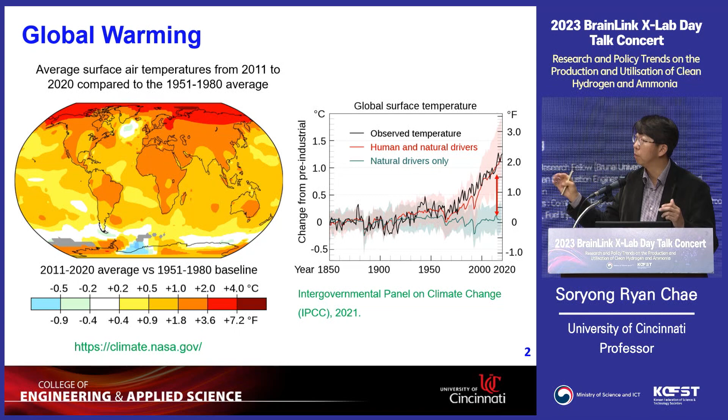So why is hydrogen so important? If we think about volume and energy density, this is pretty much obvious. When we drive a vehicle to get a 500 kilometer range, you may need 10 gallons of diesel. But with a lithium-ion battery, the volume or mass of the battery is tremendous, maybe more than 10 times. But hydrogen is very competitive, we just need 6 kilograms of hydrogen to fuel the car for a 500-kilometer range. So this is an obvious benefit why we are looking at hydrogen as an energy carrier.

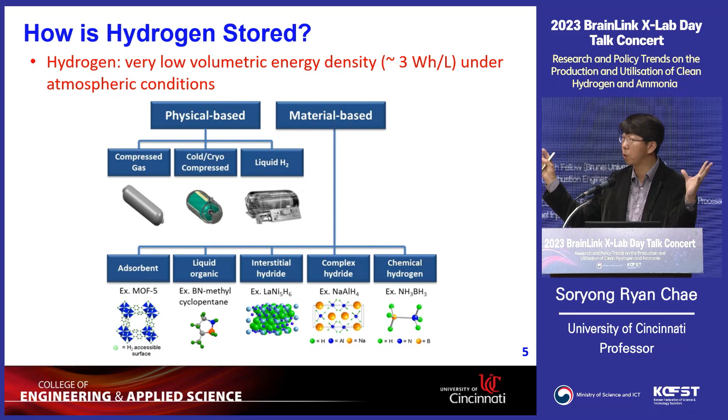And how we can store hydrogen: there are some other ways, but typically we use a physical method. We can compress, we can change gas to liquid, and we also use some materials including adsorbents, MOF, or some hydride forms. So we can store hydrogen and release it whenever we need. However, if you see this graph, there are so many operating conditions limiting the practical storage of hydrogen. For example, on the left, for liquid hydrogen, pressure will be very moderate, but temperature is minus 250 degrees Celsius. For compressed hydrogen, temperature is about room temperature, but we need a very high pressure. So there are pros and cons for each method, carefully thinking about the operating condition, how we can compress or store it, and how we can release hydrogen.

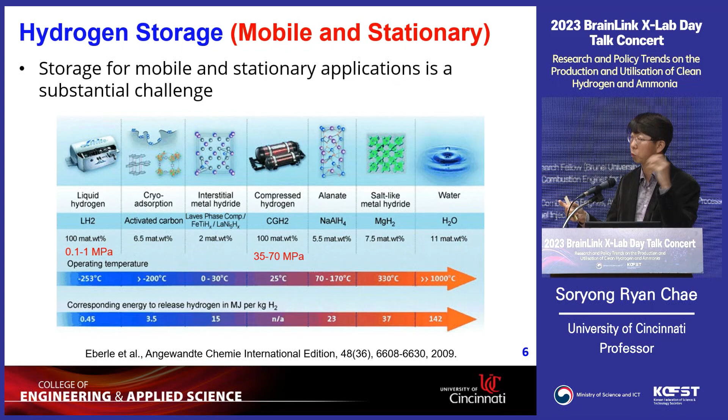The practical approach is how we make this more economically feasible. So please remember that, not just hydrogen, but there are a lot of energies involved to capture or store hydrogen and release it for energy production.

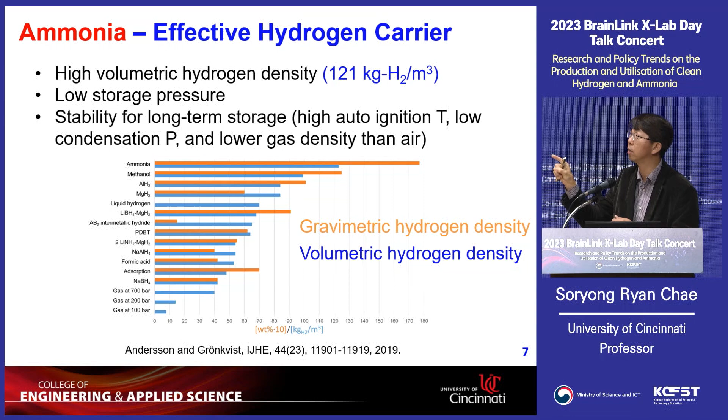As one alternative, I'd like to talk about ammonia. Ammonia has very high volumetric hydrogen density, about 120 kilograms of hydrogen per cubic meter. And ammonia has a very high auto-ignition temperature and low condensation pressure, and also lower gas density than air. So there are many benefits. We can use ammonia as an energy carrier, then it can be a source for hydrogen production. On this graph, on the top, I'm sorry for the small characters, ammonia indicates very high gravimetric hydrogen density, and the blue bar indicates volumetric hydrogen density. So it will be a good candidate as an energy carrier.

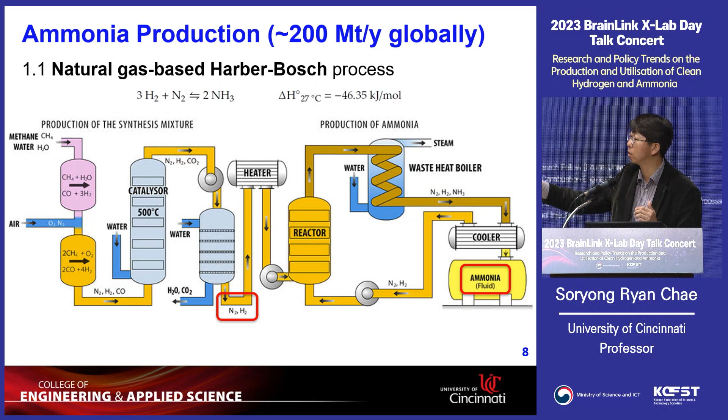How can we produce ammonia? If you are working in the chemical engineering area, the traditional Haber-Bosch process is very famous. We first produce a syngas containing carbon, nitrogen, and hydrogen. Then that goes to the reactor at very high temperature and pressure. Then eventually we produce NH3. Then through condensation, we can produce ammonia. And there are also other methods based on electrolysis.

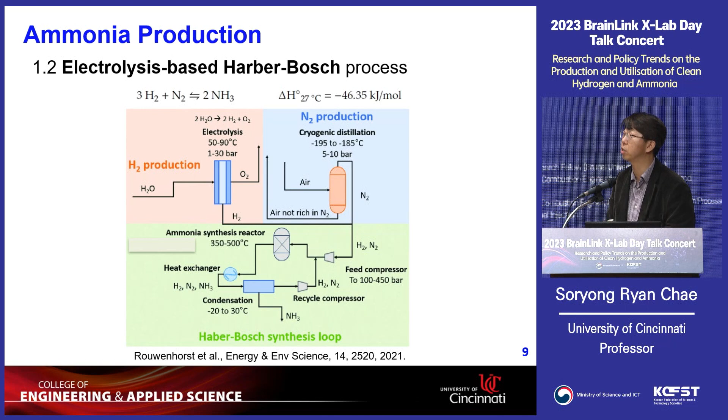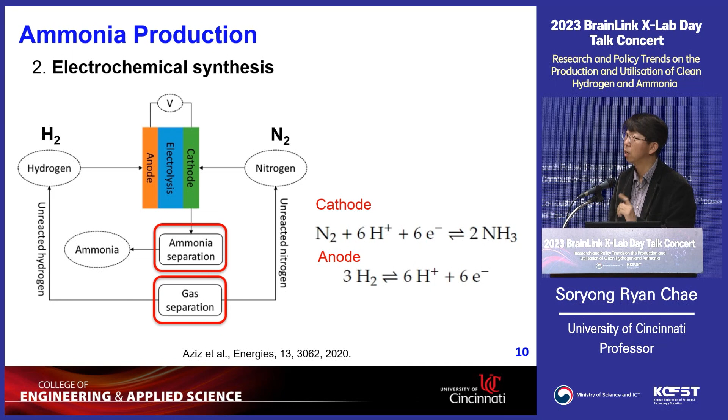However, if I highlight the challenging point here, we need to separate ammonia, and we also need to separate hydrogen and nitrogen to recycle them into the system to increase the efficiency. So there's a very good R&D point for the future.

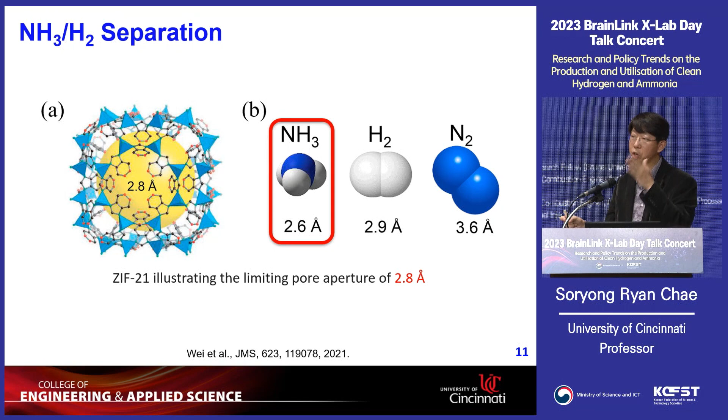And I'm talking about ammonia and hydrogen separation because they are very close to each other: ammonia 2.6 angstrom, hydrogen 2.9 angstrom. Technically, it's very hard to separate them, but scientists are working hard. They invented a very nice material with a very sharp cutoff, so they can separate ammonia and hydrogen very efficiently.

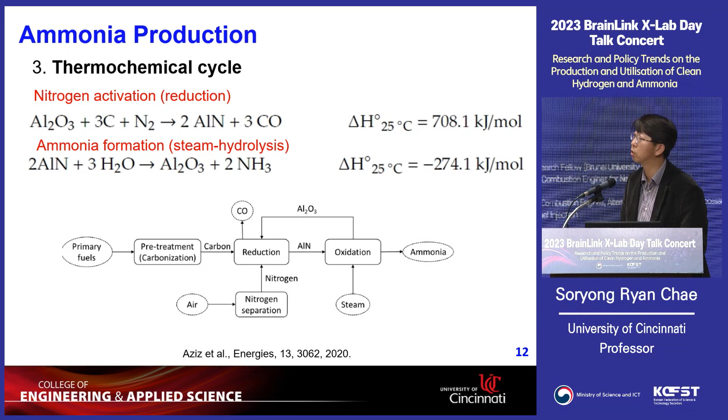And the last method I want to introduce, maybe the second last one, is the thermochemical cycle. If you see here, we have a carbon source and a carbon precursor. Then with aluminum oxide, we can have aluminum nitride. Then we oxidize the aluminum nitride to ammonia, so we can get ammonia. There is a lot of thermodynamics involved here for the reduction and steam hydrolysis, so it is a good challenge for our society.

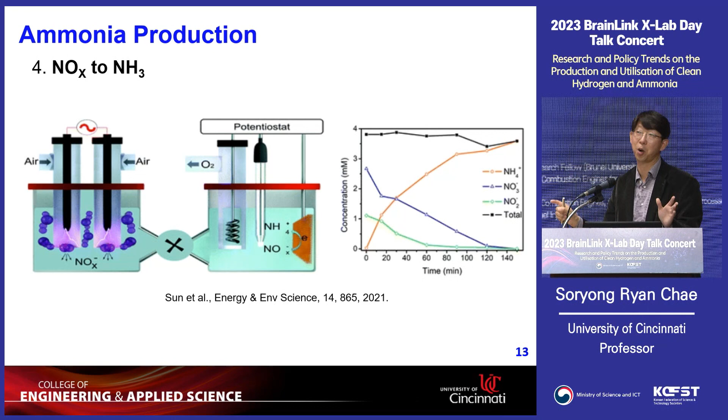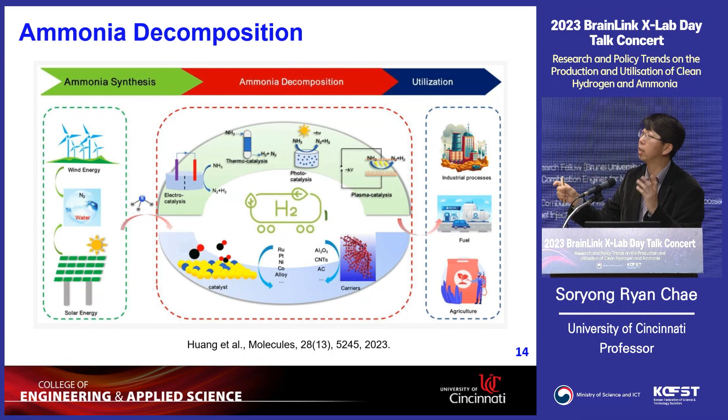Once we have ammonia produced, the next step is we transport that ammonia and we get the hydrogen. I'm sorry for the small characters, but through electrochemical reaction, thermochemical reaction, photocatalysis, and plasma catalysis, we can get hydrogen from ammonia, but a lot of catalysts and thermodynamics are involved.

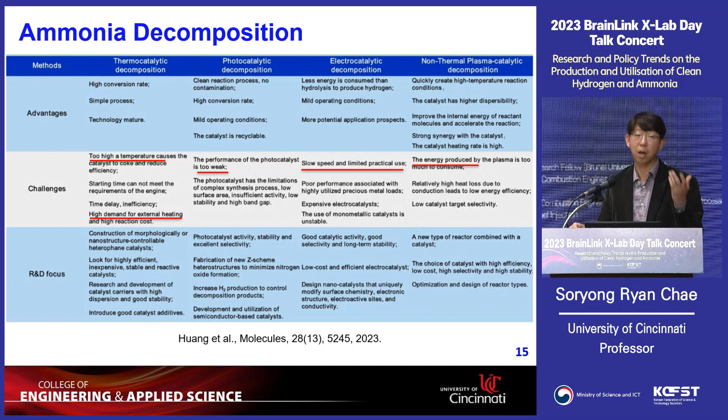I would highlight that all these methodologies are technically feasible, but we still suffer from high operation cost, the instability of the material, and the stabilization of the process. So there are still a lot of things we can work on together to make green ammonia.

So with that, I'd like to conclude my talk: ammonia is a very good potential hydrogen carrier, but we need ammonia production and decomposition. At the moment, ruthenium-based catalysts are the winner in the market, but whether we can find a more economically feasible material, stable for long-time operation, is the challenging point.

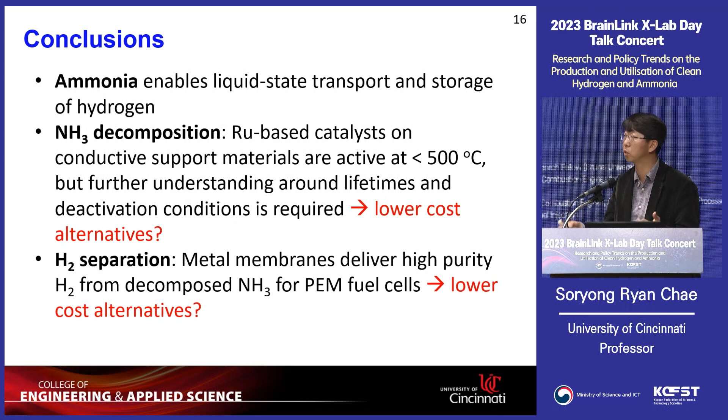To separate hydrogen from the mixed gas, metal membranes are quite promising. There are a lot of studies, but it's still a very expensive material. So whether we can fabricate a hybrid type membrane with better efficiency and selectivity to separate hydrogen is a challenge and also an opportunity for us.

Through this BrainLink X-Lab Day, I met a lot of good fellows and experts working in this area. So I'd like to launch a special issue on this topic through this nice discussion, a special issue next year in the Chemical Engineering Journal. I'd like to see that happening through these wonderful opportunities.

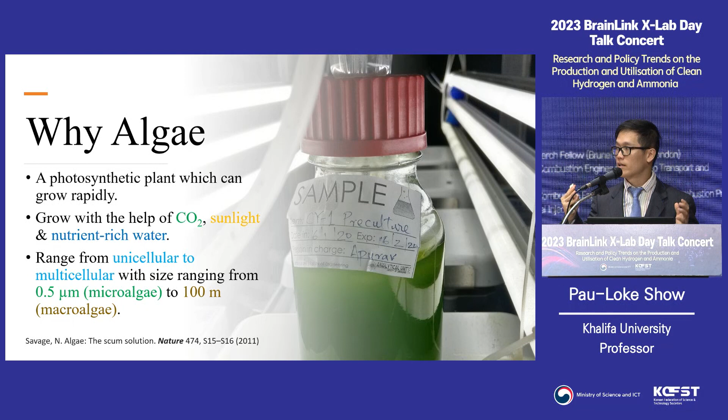Right, so microalgae grow with carbon dioxide, sunlight, as well as nutrient-rich water. Nutrient-rich water can be salt water, seawater, or wastewater as well. Microalgae range from unicellular, which is a single cell, to multicellular, which is a lot of cells, with sizes from 0.5 micrometer, which is very small, up to very big ones we call seaweed, which can be up to 100 meters.

Right. Just to let you know, there are a lot of ingredients inside microalgae. The first one is carbohydrate, which you can use to make bioethanol, biobutanol, bioplastic. The second ingredient is protein, which you can use to make animal feed, human nutrients, single-cell protein, as well as cosmetics and biofertilizer.

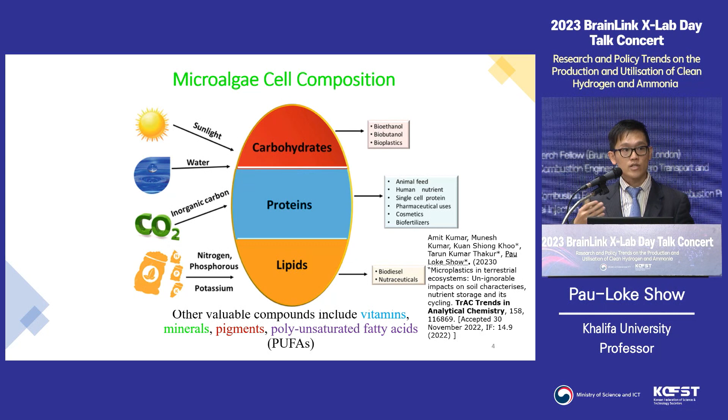And last but not least, the special ingredient inside microalgae which everyone wants to get is lipid, which is the oil content in microalgae, which you can use as a biofuel as well as other nutrient products. Right? Of course, we cannot forget there are other valuable compounds inside microalgae, for example vitamins, minerals, pigments, poly-unsaturated fatty acids, which you can use as supplements or cosmetic products.

Right. Just to share with you a quick fact about microalgae. Microalgae is actually superior to conventional protein feed. Why do we say so? Because to produce 10,000 kg of protein from microalgae, you only require 0.7 to 2.5 hectares of land, which is relatively much less land compared to crops producing that much protein.

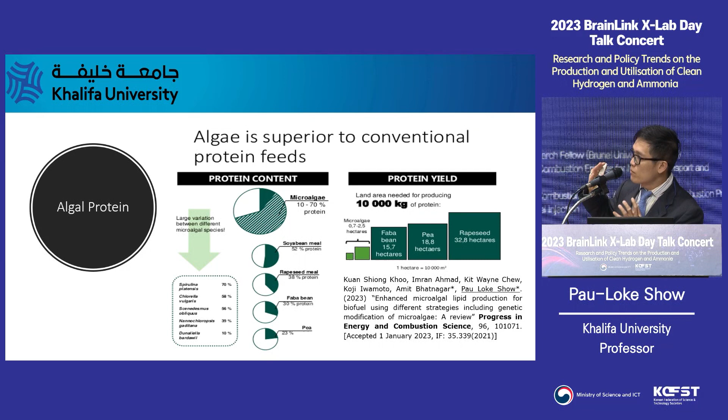So this is very good for future food, because nowadays the population keeps growing, and we have limited land for human beings. That's why we need more food, and that's why we need more land to grow enough protein for human beings.

Future food, because plant-based meat is now a very hot topic, so you can use microalgae to grow future food. Microalgae also have the ability to absorb heavy metals, so we can use them as water cleaners in industry. As well as pigments, as I mentioned, astaxanthin, fucoxanthin, all these pigments are available in microalgae. And last but not least, microalgae is a third-generation biofuel, so you can use it as biodiesel.

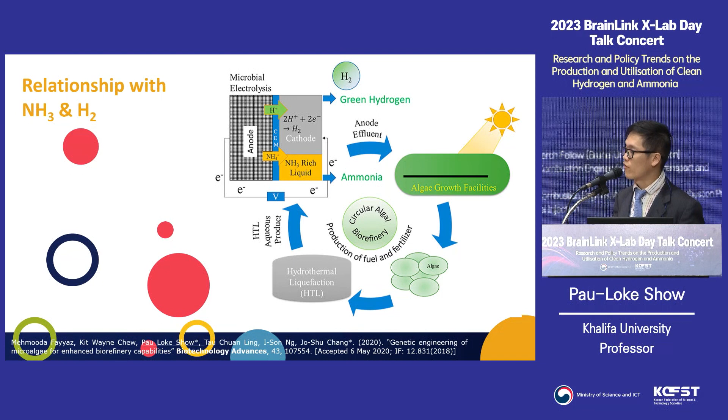Right, so let me share with you a little bit of this relationship. In general, you can see it requires a circular algae biorefinery. From the algae growth facility, you can produce as much biomass in terms of microalgae. They undergo hydrothermal liquefaction, which we call HTL. Then you will produce a lot of this ammonium. From the ammonium, they recycle again using this circular algae biorefinery. Right, so what is so important?

Because in the past, we were talking about first generation biofuel. Everyone was talking about corn, cassava, and also sugar cane. Second generation biofuel, we're talking about lignocellulose, which is bio-waste, sugar cane, palm waste. Then third generation biofuel, everyone talking about microalgae. That's why you can see microalgae produce a lot of biodiesel, biofuel. But this has become history. Nowadays, starting from 2020, everyone is talking about fourth generation biofuel, where we need to look at AI, artificial intelligence, with synthetic biology, where we do some genetic modification inside so that we can produce as much production as we want.

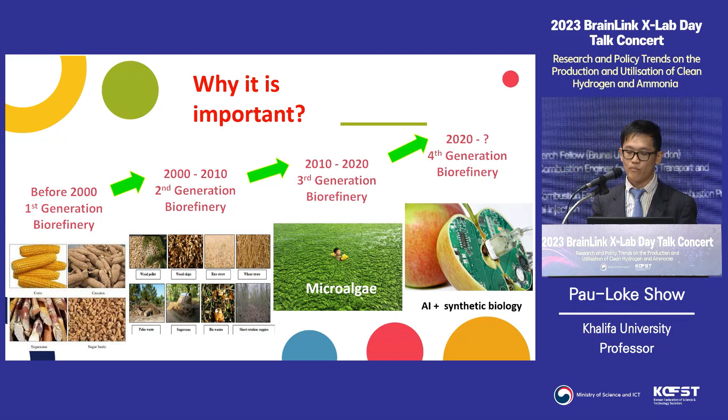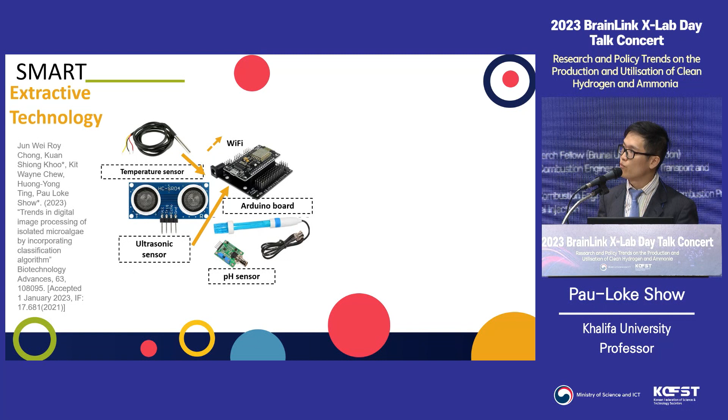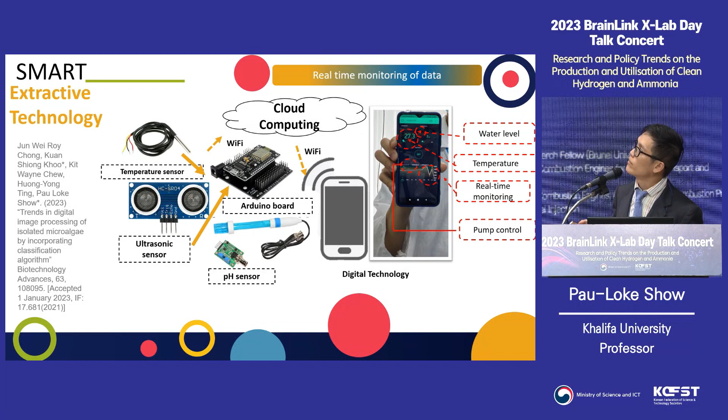We just extract microalgae using our system. We control it using a temperature sensor, ultrasonic sensor, pH sensor. Then we link to the Arduino motherboard. Then we link to the Wi-Fi to have big data analysis under a cloud system. Then connect to digital technology, which is a mobile phone or your computer. This is the interface with the apps that we developed. We can see the water level, temperature, real-time monitoring, as well as pump control.

Right, so let me continue with the smart extractive technology. This is the smart technology that we generated. I think this is a short video. Yes.

So of course, we claim it as smart because we have the digital as well as sensor in between, so we can monitor and control it and feedback at the same time. So this is what we call smart technology. Actually, this is a new patent that we have got, and some industries are using it, not only in microalgae technology, but in wastewater as well as the food waste industry, because we can use this to extract the active compound that we want.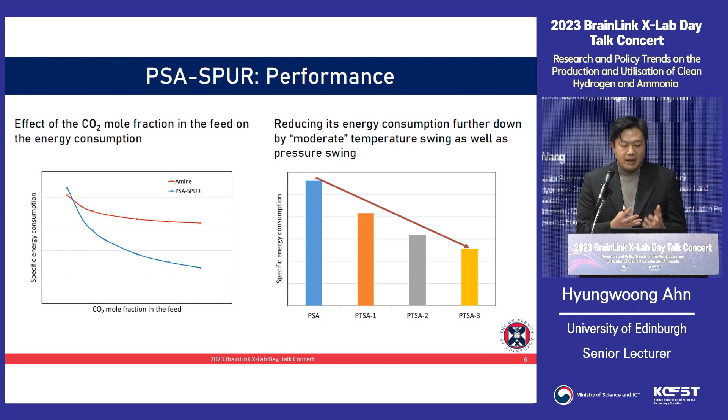We also started a new project funded by the UK EPSRC, and we are collaborating with HD KSOE, the largest shipbuilder in Korea. We are comparing our PSA-SPUR process to the amine process. Basically, our PSA-SPUR process spends less energy than the conventional amine process, and it can spend even less energy by implementing temperature swing as well as pressure swing. So we are demonstrating this process in the lab.

We can capture CO2 and produce a 95% purity CO2 product. The productivity is very high. We are using a commercial sorbent, there's no temperature swing, and we don't need very low desorption pressure.

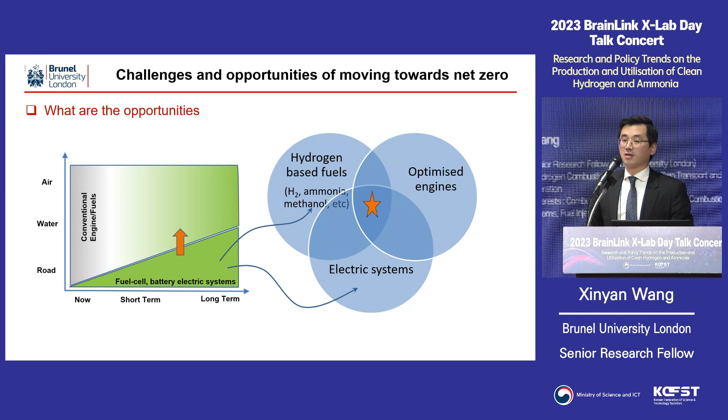Why we use hydrogen? Obviously, it is a good energy carrier. So you can see the top. Basically, by using hydrogen or any other chemical-based source, we'll be able to store energy for a long time and a large energy quantity. And in the UK, government has published the hydrogen strategy to promote the development of hydrogen technologies. Globally, you'll see a lot of research activity.

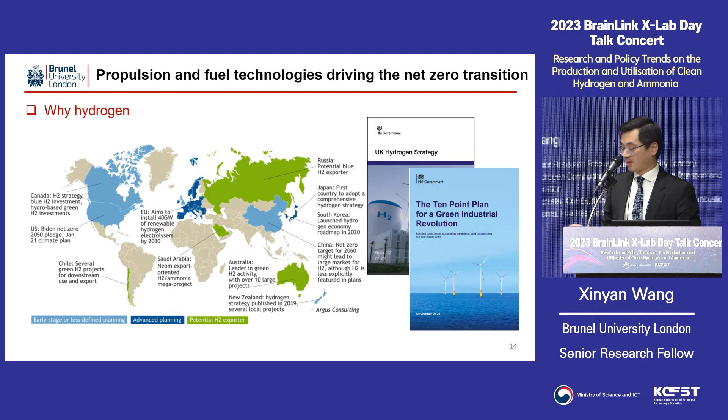And a few weeks ago, UK government also passed the law. You will be able to see the government now is trying to promote the development of hydrogen infrastructure for future hydrogen systems.

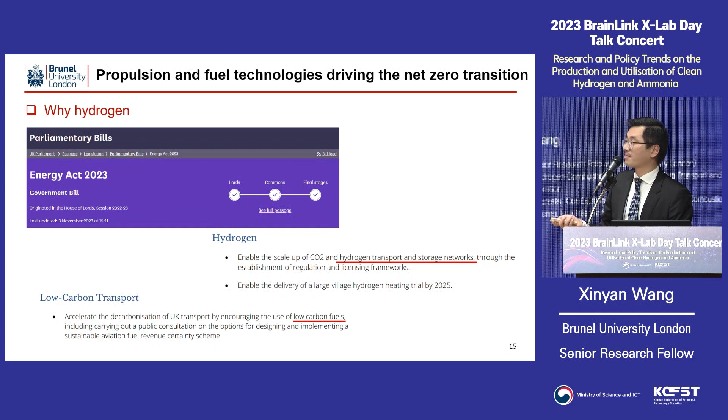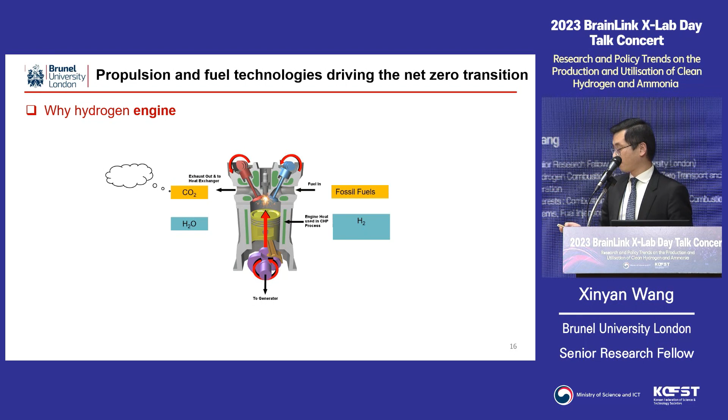And then people may ask why we are still working on hydrogen engines. Obviously, when we burn fossil fuel, the ICE, the combustion engine, will produce carbon emission. But when we use hydrogen or other zero carbon fuel, it will not produce any carbon emission. So if you look at this life cycle analysis, if the engine burns zero carbon fuel, the life cycle CO2 emission will be comparable to fuel cell technology.

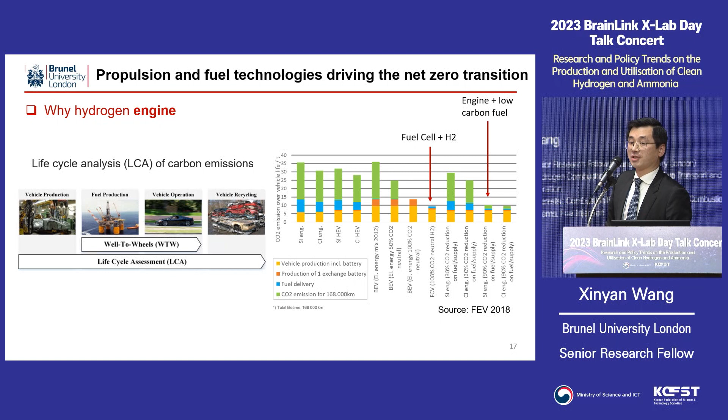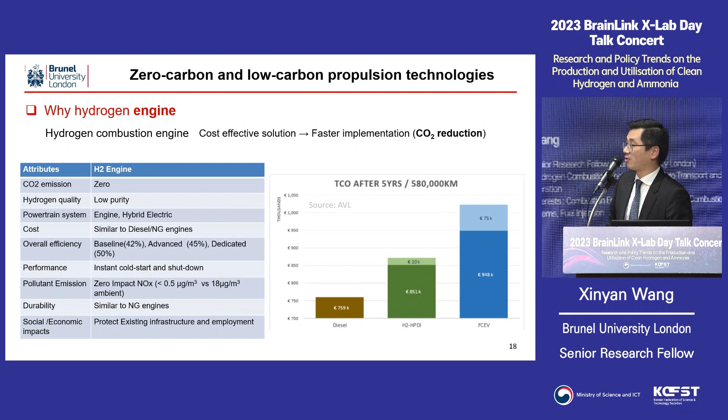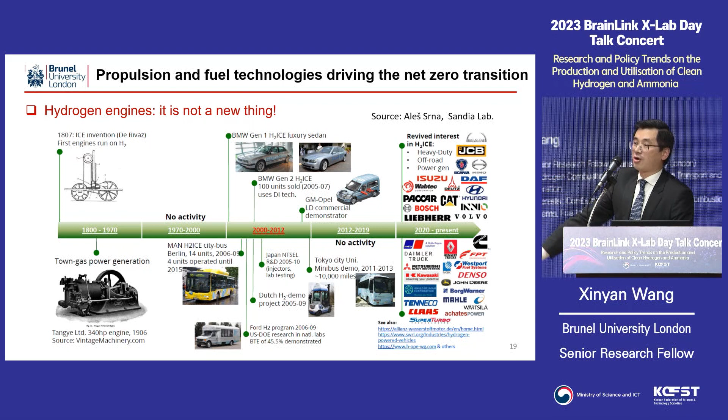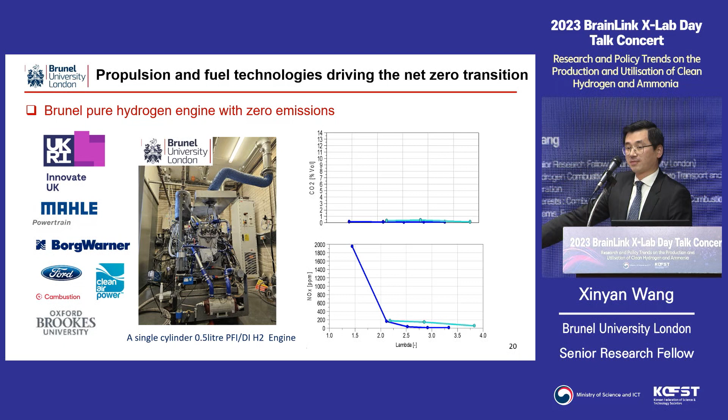And at Brunel, we have done some work on hydrogen combustion engines. That's a test cell. You'll be able to see the engine in the middle. And here I just show two results. One is CO2. When we run hydrogen, there are no CO2 emissions. And if you look at the bottom graph, when we use additional air to dilute the combustion, we can also mitigate the NOx emission. So there will be no pollutant emission from the engine as well.

This is another project. We convert a boat engine. Initially it's a diesel engine, but we convert it to run on hydrogen. Then similarly, we can see the blue line is the hydrogen result; compared to other fuels, we achieve zero CO2 emission. And for the NOx, again, when we use additional air, which means a higher lambda, we achieve zero NOx emission. So it's a truly zero carbon and zero emission engine.

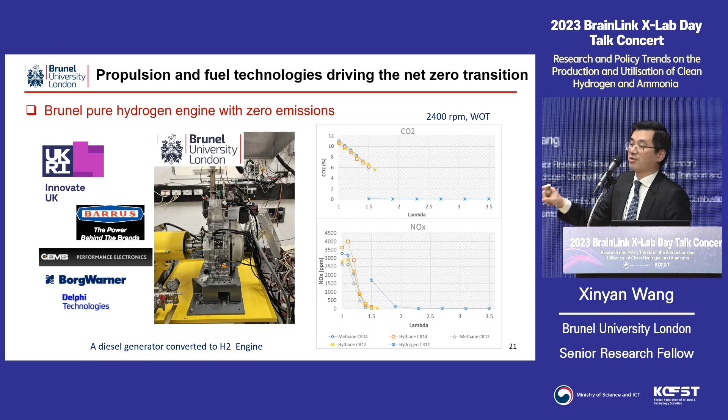And a few other projects we are working on. This is another very interesting engine concept. We call it the opposed piston engine. We're trying to convert the engine to hydrogen, and we are going to use the engine on a ship, and we are going to do a demonstration, hopefully in 2025, at sea.

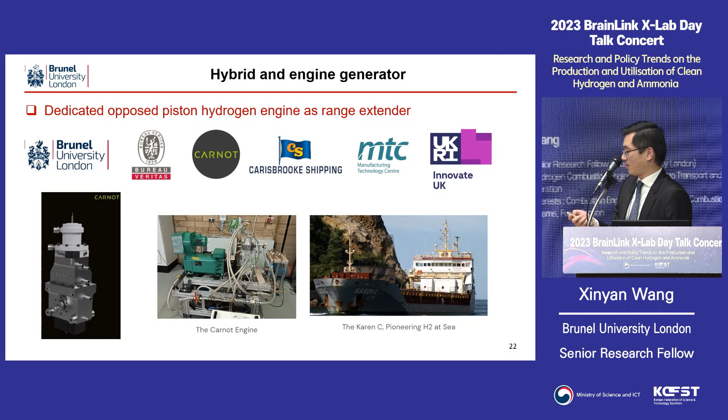And another work is a similar idea. We want to convert the engine to be an electricity generator. So we are going to modify a two-stroke engine to be a very compact linear generator for different propulsion applications.

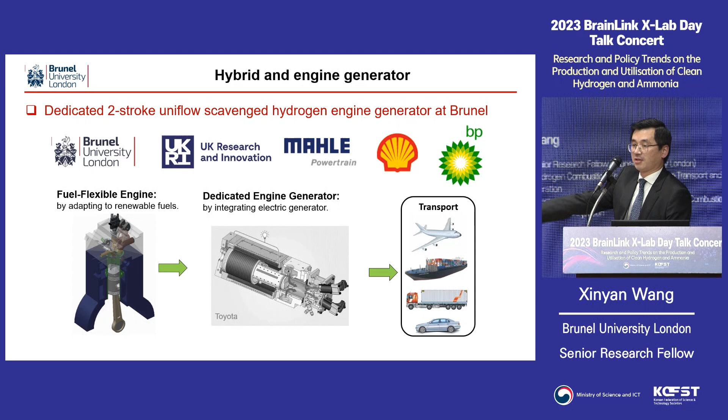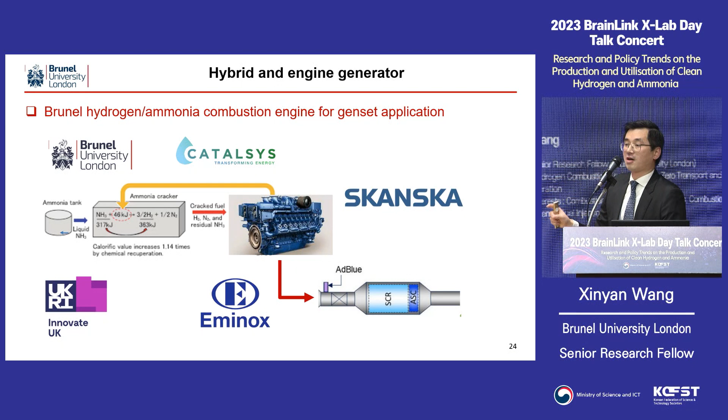And another project is about ammonia. We collaborate with industry to add an ammonia online cracker to convert ammonia into a hydrogen-ammonia mixture and then put it back into the engine. Then the engine will be a genset for construction site electricity generation. And obviously we collaborate with industry to work on the after-treatment system to remove the NOx emission.

And also we do a lot of fundamental research. You can see some optical engine results, and also we do CFD simulations to assess the development of hydrogen or ammonia engines.

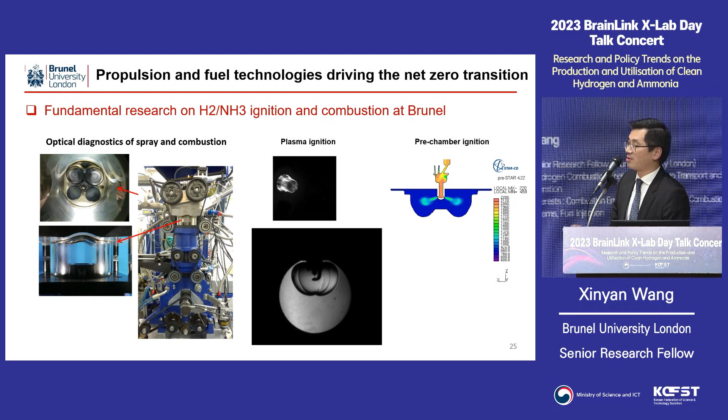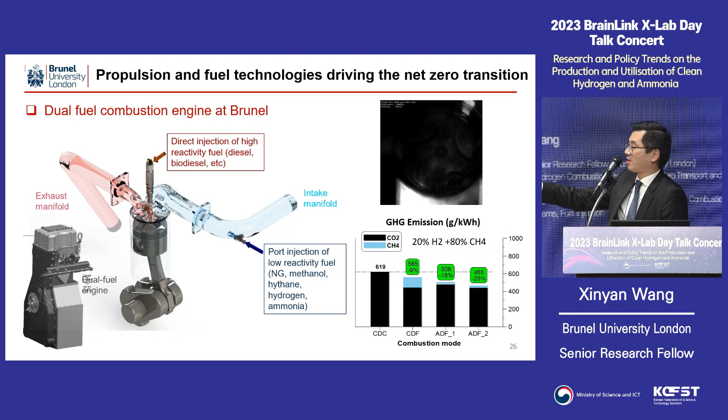I think that's what I want to mention, a few conclusions. First, I think in the future, the propulsion system will be very diversified. There will be battery electric systems, fuel cell systems, or combustion engines. And I do believe the hydrogen combustion engine is a very promising technology that will enable us to get closer to the net zero target. I think that's all, and thank you again for your attention.

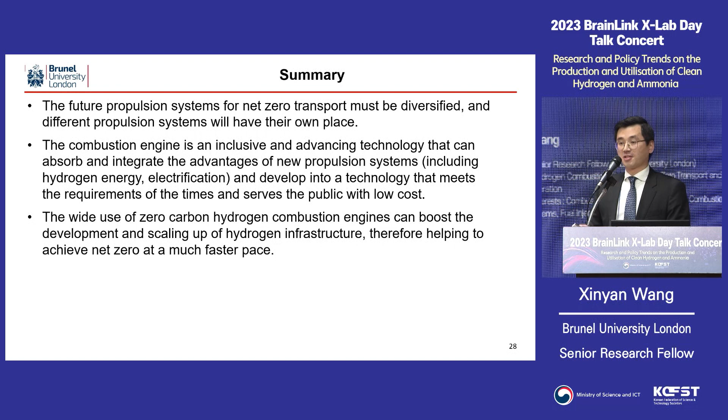The next speaker is Jonathan May. He works at Siemens Energy as the principal manager. His topic is the HyFlexPower project, demonstration of an industrial power-to-hydrogen-to-power advanced plant concept with up to 100% hydrogen in an SGT-400 gas turbine.

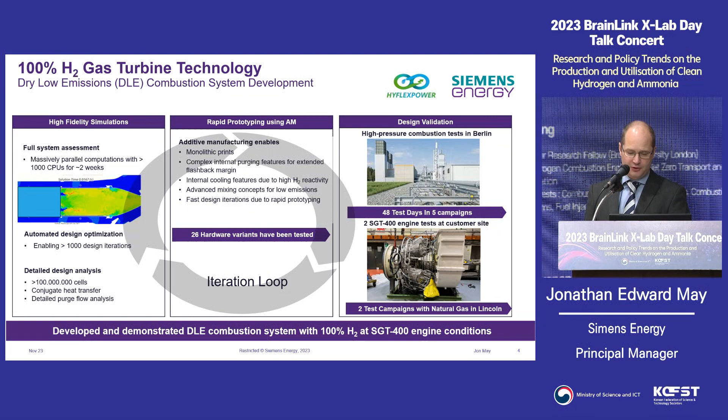Through the 2 summer testing campaigns at the sites, we were able to achieve the targets from the EU project. So we had double figures of hours of operation at greater than 80% hydrogen and several hours at 100% hydrogen as well. We are able, through this demonstration, to put into the real world and show it's entirely feasible to put this whole system integrated together so that it works and delivers that round trip using hydrogen as a storage medium to smooth the energy requirements.

This has caused a lot of interest, and just as available are a list of some of the press releases that were made and the thanks that we need to offer to all the partners that were supporting this. This was covering a lot of companies and a lot of universities with much of the support and a huge amount of effort from those people.

And where we get to from this is this was part of a Siemens Energy technology and R&D effort. And although this is demonstrated in the SGT-400, which is at the smaller end of the Siemens Energy gas turbine product range, another one of the challenges that we set ourselves was to make a technology that is not only suitable in that size, but that can be scaled. And we have the absolute intention and route map to deliver this same technology into a wide variety of products at very different power ranges in the Siemens gas turbine range.

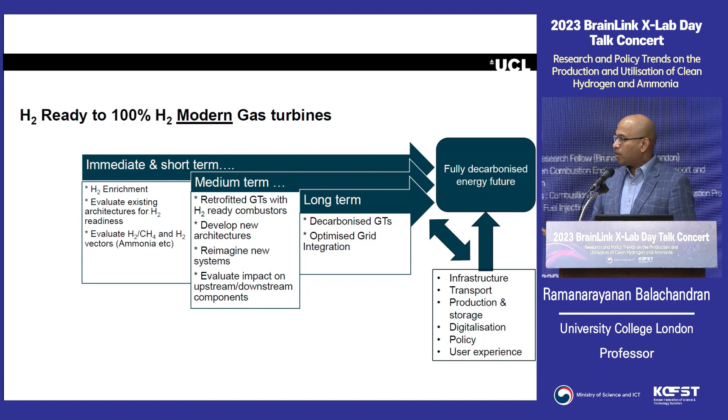But what are the challenges? Let's look at the technical challenges of using hydrogen in a gas turbine. We know that hydrogen has high flame temperatures. In modern gas turbines we try to burn very lean, which means flame blow-off is a problem, and particularly for aero engines, flame blow-off is a serious issue. Combustion instability is a common problem that we will talk about in more detail. And flame flashback is a problem which emanates from the basic nature of hydrogen fuel.

So we evaluate different architectures. There are emerging combustion architecture technologies in premixed, micro-mix, and lean direct injection, and common diffusion-based combustors generally can handle high hydrogen. But there are positives and negatives for each architecture, highlighted in green there. One commonality is something called combustion dynamics, a problem that you design out at early stages. Otherwise, it will be a costly problem.

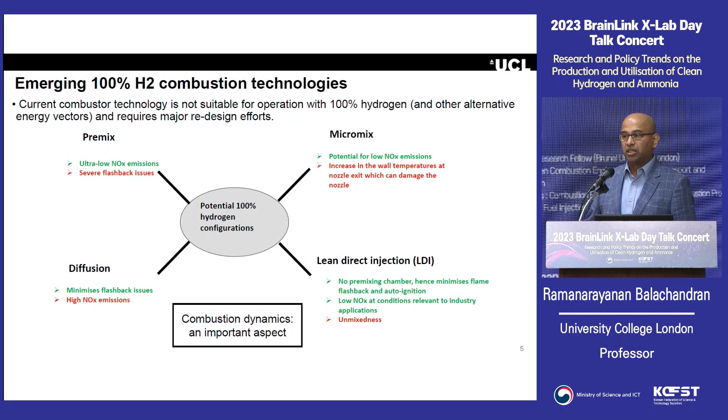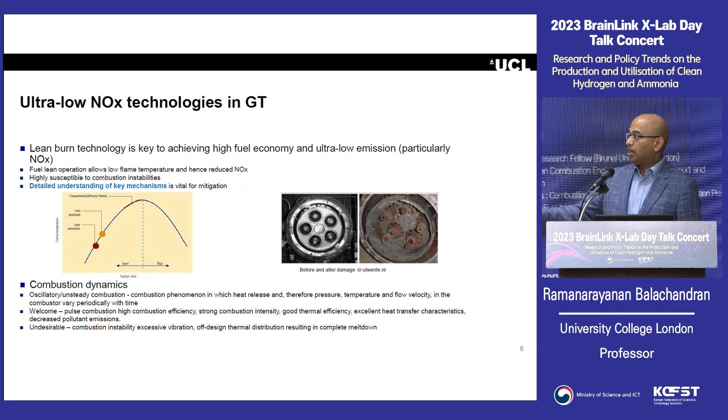So what is combustion dynamics? In ultra-low NOx gas turbine technologies, combustion dynamics comes from operating lean. You can see the two dots there. If you're operating in that zone, any change in the x-axis gives a nonlinear change in the y-axis. Then it can go into a feedback loop, and you can end up with a damaged combustor. This is what a feedback loop looks like.

So now, if we want to study the first part, immediate and short term, looking at hydrogen in an existing gas turbine, what we need to do, first of all, is to simulate in a laboratory scale the complex combustion behavior of a real gas turbine. So here the example is the SGT 100 or 400 fleets of Siemens Energy. And then what we have done is trying to mimic the combustion behavior in a laboratory scale. And what we've also done is try to connect 2 or 3 cans together so that we can allow one can to interact with the other.

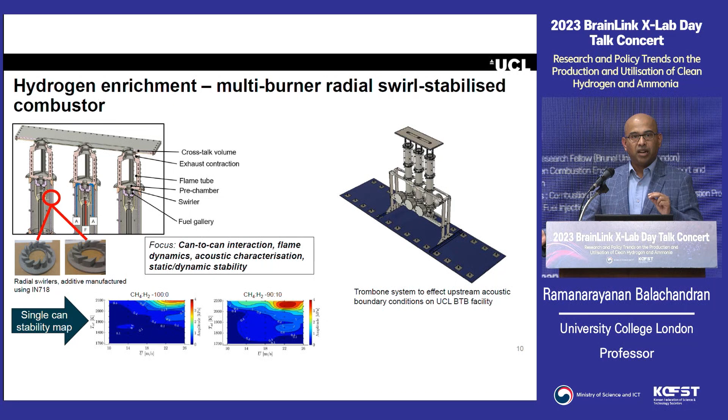So these are the existing gaps in the research that are required to fully allow hydrogen combustion in the current gas turbine. And an example is that in a single can, if you add just 10% of hydrogen, you can see at the bottom, the stability map drastically changes. The region of stability has reduced drastically just by 10% addition.

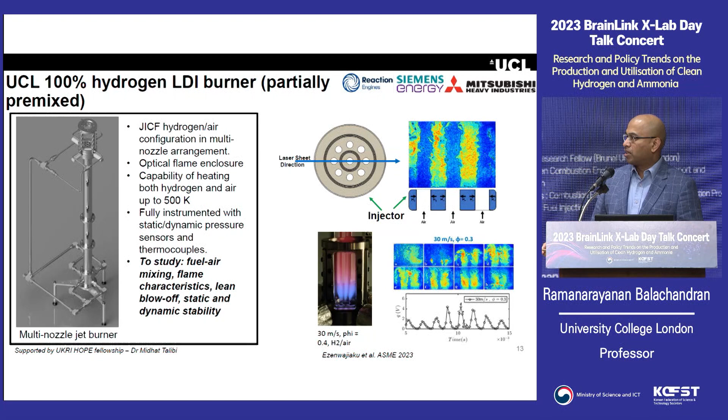So the next project, and we had a presentation earlier about HyFlexPower. Our role, UCL's role, is to develop a generic H2-ready jet burner so that the flame is very similar to the original combustion configuration, and then we can study the flow, the flame, as well as the static and dynamic stabilities.

Finally, we cannot talk about hydrogen without talking about ammonia as a hydrogen vector. If you crack ammonia to produce hydrogen, some element of ammonia is going to be there. That is something that can easily be used if you have a hydrogen combustor. Because our theme was looking at hydrogen for gas turbines, ammonia with hydrogen makes a very good candidate. So what are the challenges? Ammonia is a new fuel, hydrogen is a new fuel, but combining them makes it even more complex. Ammonia has low flame speed, hydrogen has very high flame speeds. You could combine them together to get an optimum mixture.

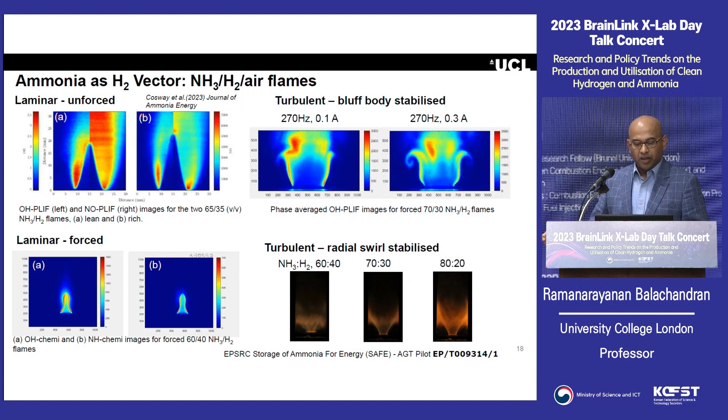And at UCL, we do laminar fundamental studies, and then we extend them to turbulent flames, and then to fully practical combustion scenarios. By addressing all these important gaps, we believe we can help industry realize the dream of hydrogen gas turbines.